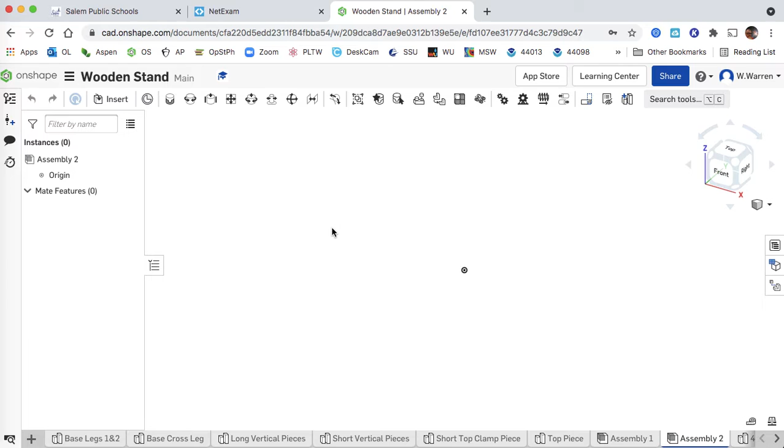Okay, so you're going to go to your assembly 1. I've opened up assembly 2 because, as I said, I just did it. There's my final product, but I made some adjustments I'd like to make to the first video, so here they are. Now, again, you go to your assembly file, and if you don't have one, you can add it right here - create new assembly, right there, bang.

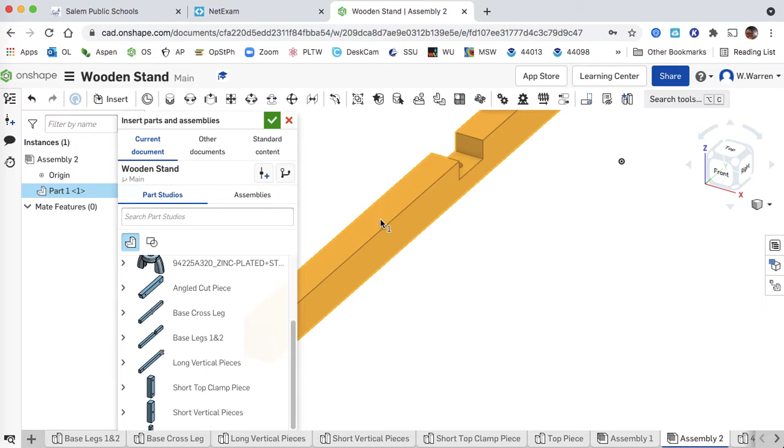But what we're going to do is the first step is insert your parts. I'm going to work in sections here - I'm just going to do the base first. I've got 2 of these base legs. I'm going to click on it and then just drag out here and click there. I'm going to do that again and put it out here. And then I've got a cross leg right there - just drag it out here into my work plane and check. So that's the first thing I'm going to do.

I'll talk about that hole in a second. You may not have that yet. Okay, I did that in the second video actually, and you'll see why. But let's just let the second video speak for itself, and let's just finish up the first video.

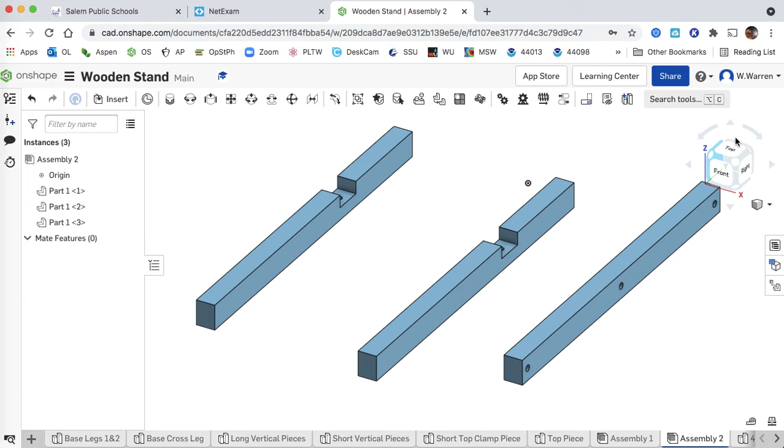So first of all, let's see - I think I'll look from the top, and I'm going to rotate this piece 90 degrees this way, 90. Okay, and I'm going to accept that. I'm also going to rotate it.

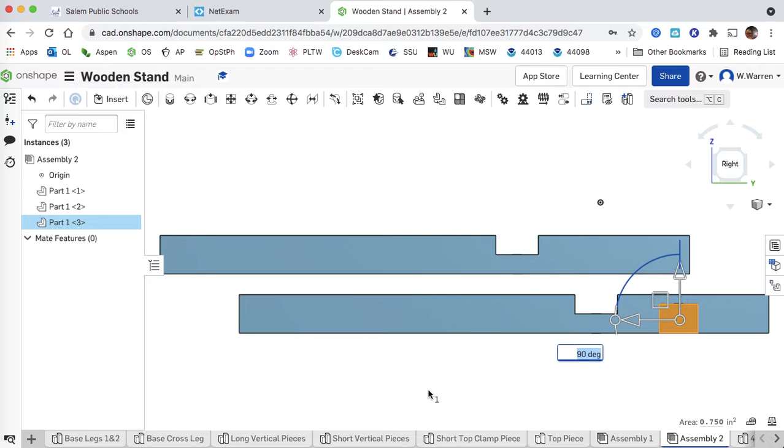So I'll go the other way. Let's see here, I think I'll look at the right side, and this guy has to rotate 90 degrees this way too, so the holes are facing up, right? So 90, bang, okay, and click outside to accept it. And now let's take a look again at the top.

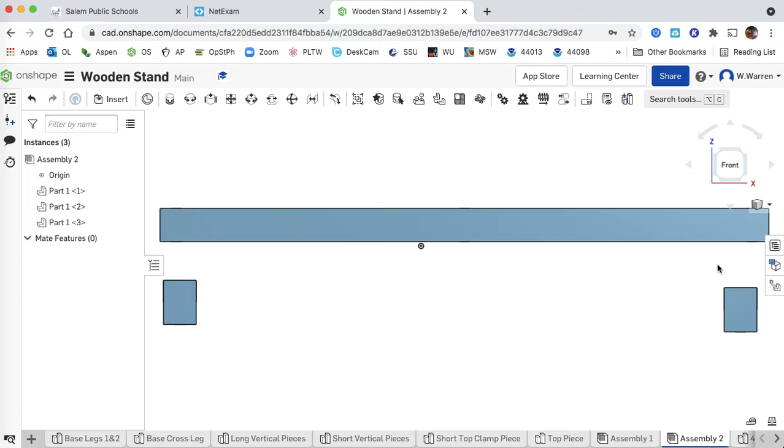Okay, let's just move these into approximate positions, just close, right? So I'm going to look right at it, see what's going on here. Yeah, that guy's a little bit higher, that guy's a little bit lower. But that'll go in that region, and looking from above, what do we see here?

Oops, wrong way. Yeah, and so then we just have to align it on this axis a little bit - again, just getting close. So I'm going to leave a little bit of space actually so I can get under and get to those holes easily.

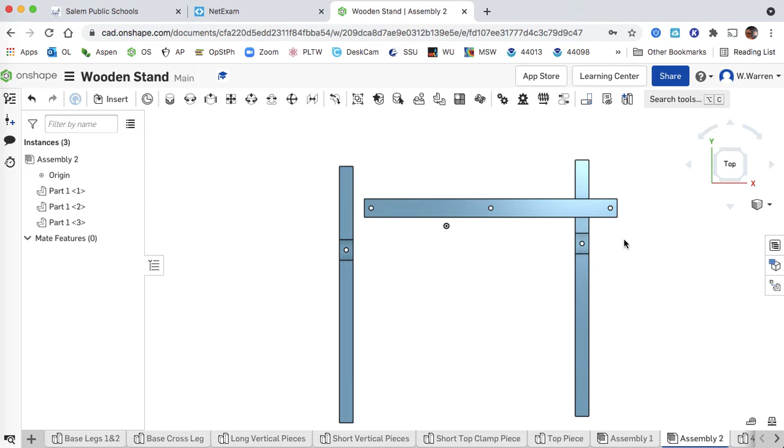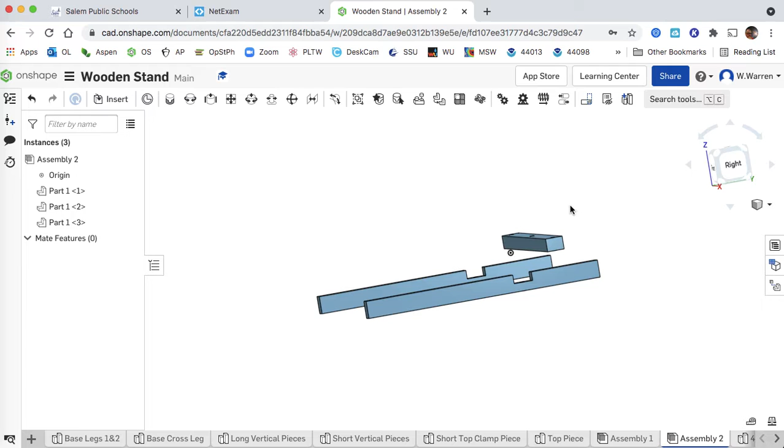But I found that the easiest way - I first started by doing plane mates, and that worked pretty well, but the planes don't all line up exactly because this top plane sticks up a little bit, and this is a clearance fit, so there's a little bit of space on either side of that. So if you secure it with a plane mate to one or the other, then it's not quite centered, the holes aren't lined up. So really what I found was the best way to do this is actually the Revolute mate, right?

Just line up these holes, right? So I'm going to put that hole right there. I'm going to mate it to the center of this one right there. Look at that - perfect.

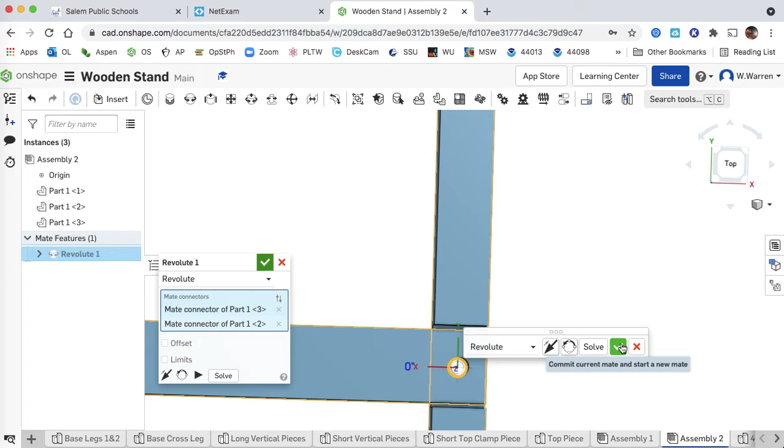Okay, it's still lit up, I can go do the other one. Backing out and going over here. I might have to move this guy a little bit. Yeah, let me turn this off for a sec to get this out of the way.

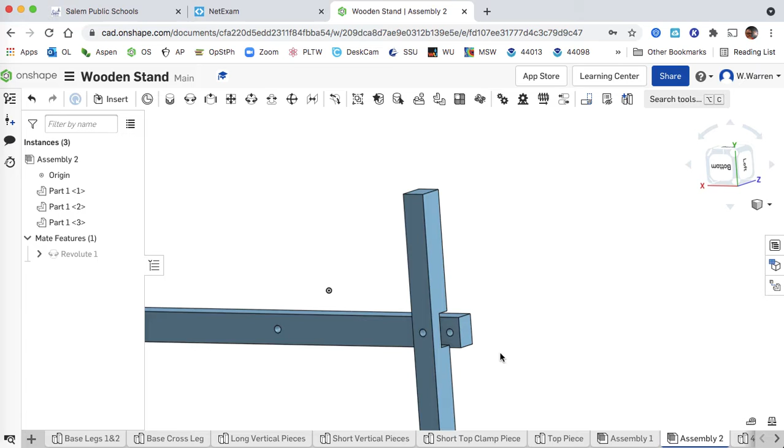So here we go. Now let's see, will I be able to get in there? I think so. Yeah, let's do the Revolute mate again. And that hole, can I see that one? Yep, there it is. To that hole. Solve. All right, that's it.

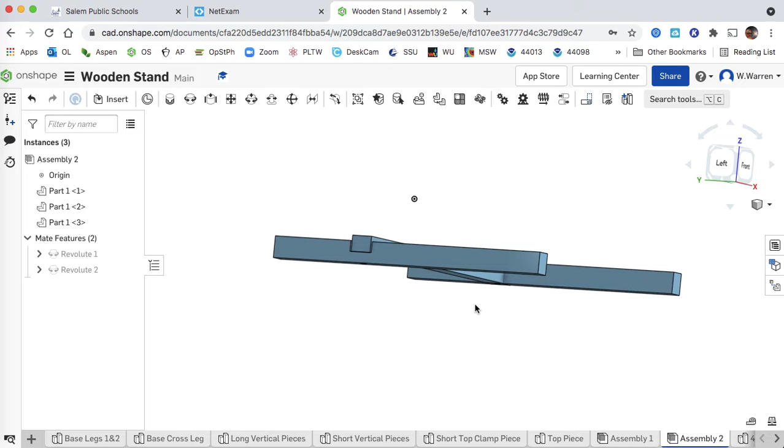You'll notice here, if we look right at the top, I can see right through those holes. Those holes are all lined up with each other, right on top of each other. Oops, this side's a little bit weird over here. Look at that, that's down below. Not quite sure what's going on there. Let's see.

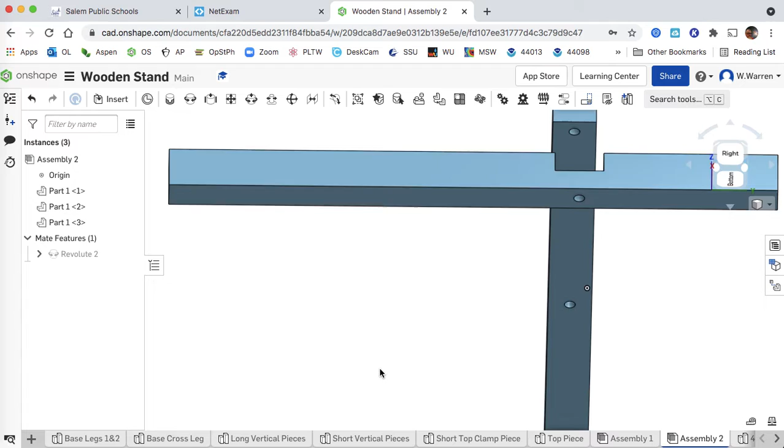That was the first mate. I'm just going to redo that one. Something funky happened. All right, so I got rid of that mate and dragged that down a little bit. Try that again. All right, Revolute mate. That hole to that hole. Let's see how we did.

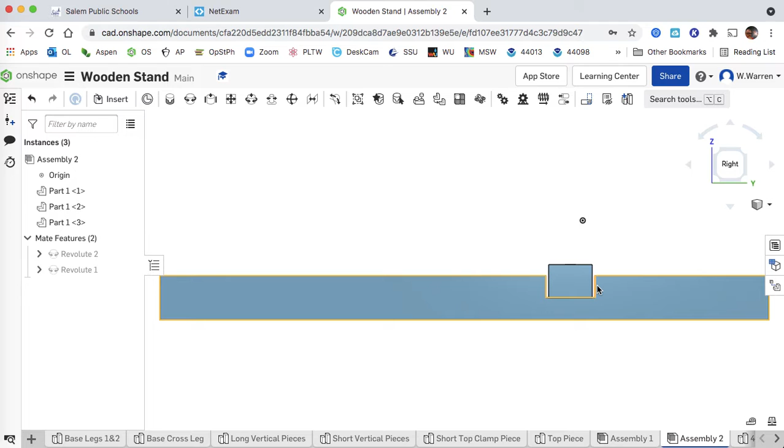Looks better on this side. Still looks good on the other side. You see what I mean by there's a clearance fit here? If we did a plane mate to that one, that side to that side, then you'd have not enough space on this side and too much space on that side, and the holes wouldn't be lined up. So I think that Revolute mate, even though these parts don't have to revolve around each other, I think that's the answer because it lines up our holes perfectly.

Now you'll see that in the second video, I created this second hole, this middle hole here. It went very quickly, and you'll see why once we get there. But it's just for placing the middle vertical support.

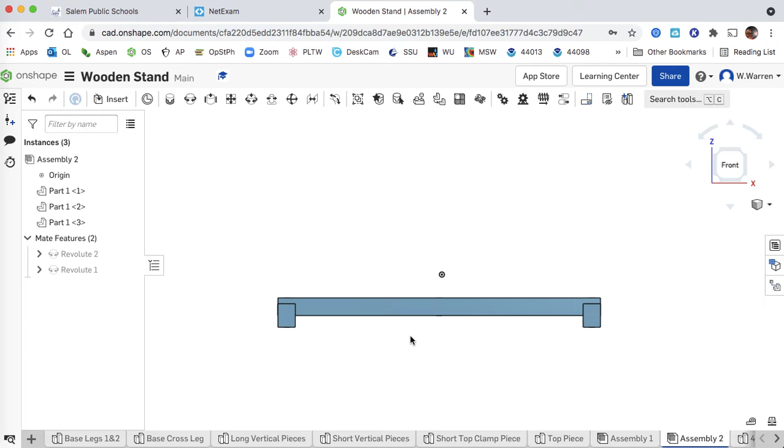So now that we've got the base done, let's import those 3 vertical legs and their 2 spacer blocks. So back to the insert. I think I just called them stuff just like that. Let's see here. Yeah, long vertical pieces. I need 3 of these. I'm glancing over at the object itself.

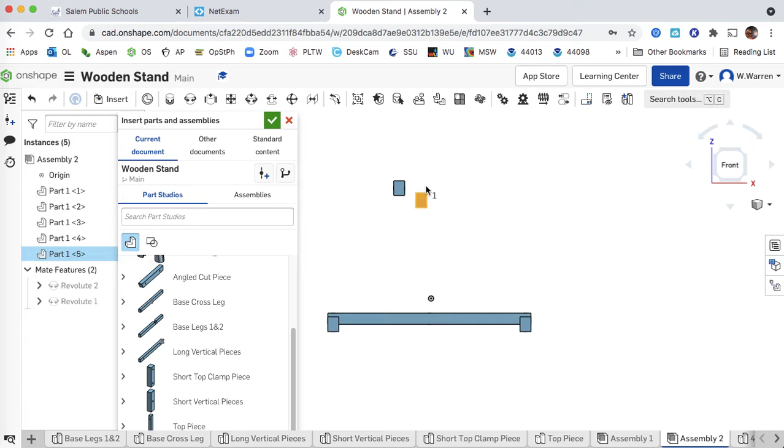Yeah, 1, 2, and 3 of these. And I need 2 short spacer blocks. Short vertical pieces? That must be it. Short vertical pieces. I need 2 of these.

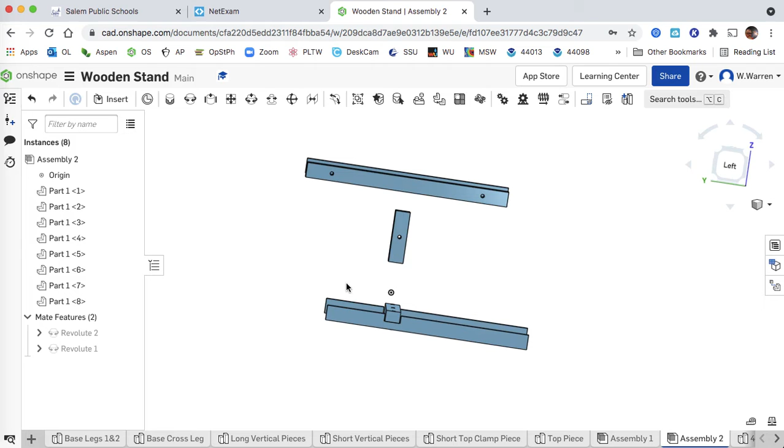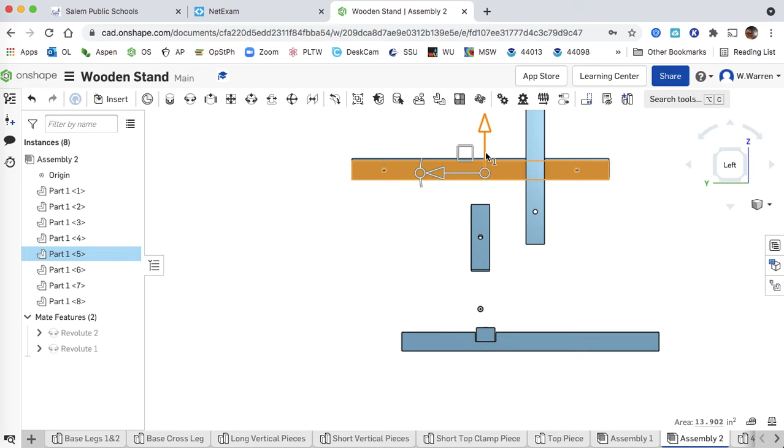Okay, so there are the pieces I need for the first vertical support. Now, clearly they are not in the orientation we want them to be in, so let's quickly look left at it and choose that one, and you'll see here the translate has shown up, and we can choose that angle, drag it a little bit, and just hit 90 degrees, boom. Click outside to accept it, do the same thing to this one. If it's not oriented properly to begin with, 90. So it's vertical, outside to select, and then boom, one more time.

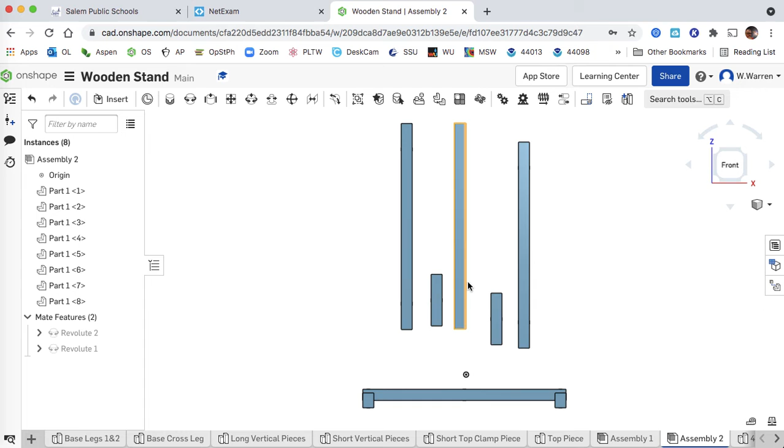These 3 are now all vertical, and I'm going to back out and clean up my space a little bit again. So they're going to go vertically right here, and the way that I'm going to do it is, quite simply, I'm going to fasten these right to this surface here, right? So let me look at the top and get things half arranged here. Boom. Maybe pull them out of the edge so you can easily get to their bottoms to do the fasten.

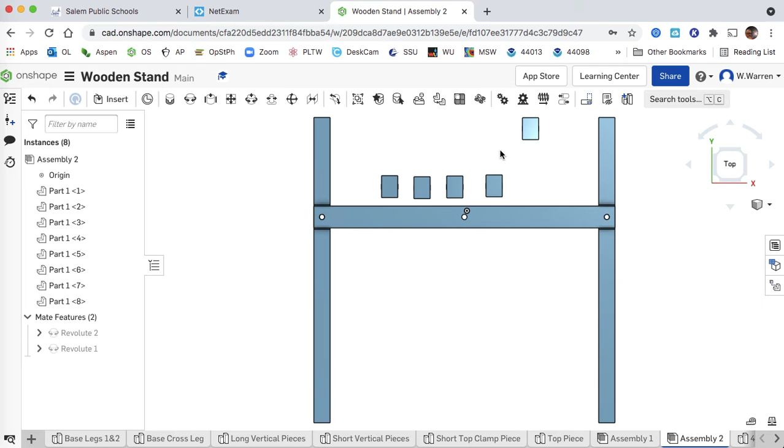That's coming up in the next video. But they're the vertical pieces. They're all in place and ready to be fastened. And in the next video, I'll have you draw that center hole, and then we'll place those right where they go, and we'll take it from there.

Right? But there's the initial build out, sort of the first part of the build, which is the base and the vertical legs that go up. And in the next video, we'll fasten these down and start adding other pieces.